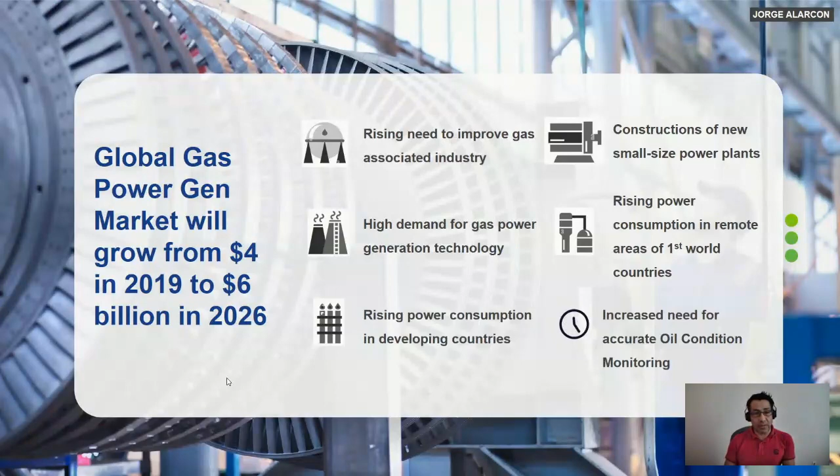So these are the situations that are changing the world as we see it. And what happened around 18 months ago?

I've been working with global customers, and I noticed something unusual from the oil analysis perspective.

I've seen a lot of problems related to four factors, factors that are not only affecting the oil analysis market, of course, but many others.

For example, the raw material for oil bases, the crude oil price, has decreased and been jumping around. So a lot of countries that produce oil decided to cut production for some months.

We have the price increasing. We have a lot of demand, but not enough supply, in some months of these past 18 months.

Besides that, we had a problem with the raw material for additives. The production of raw material for additives is concentrated in just a few countries.

Some South American countries, China, North America, no more than that, plus a couple of ex-Soviet Union countries. So the same thing happened.

These industries were affected not only by COVID, but by all the problems we've been facing through this time, and they reduced production.

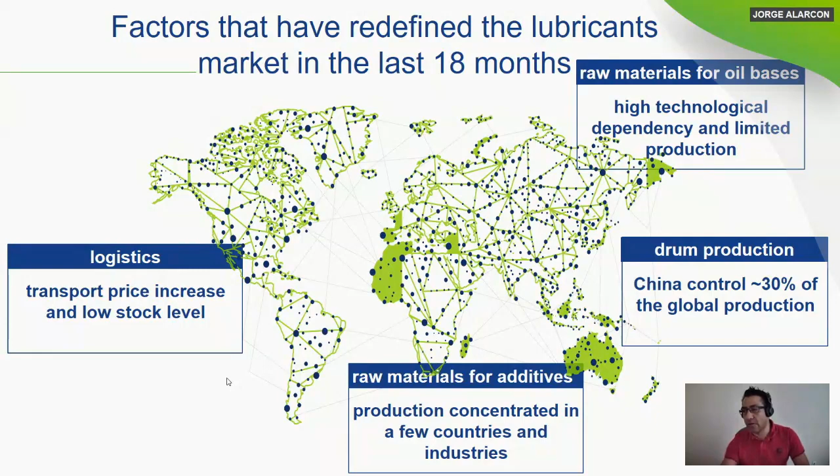Besides all these things, we have another issue that doesn't look very important, but it's critical for our area. Depending on the source, China controls between 20 to 30% of drum production, whether it's the final product or the raw material. We basically depend on China for drums, and we need drums to put the oil in. So a reduction in drum production also affected this entire situation.

So for the end user, this is the global perspective, this is the world we are living in right now. What is happening for the end user? In many cases, unfortunately, the end user needs to add a different type of oil. The problem is that the oil is probably not compatible with the one in service, but they didn't have time to run a miscibility analysis, a compatibility analysis, or any type of analysis that allows them to use this second oil in the turbine with the previous oil in service.

Same thing is happening with greases. I've seen so many problems with greases because of compatibility - and I'm not just talking about thickener compatibility, I'm talking about viscosity, oil viscosity problems, because a lot of people just use the same grease thinking the thickener is the only main thing to compare, and they forget completely about the oil viscosity.

A lot of people are just sweetening the oil, not changing the oil, because they have to wait for about 4 to 6 months to get a couple hundred liters of that specific oil. This is happening in a lot of countries, especially in third world countries and developing countries. The time to wait for some types of oils, even in Europe and the States, has been extended.

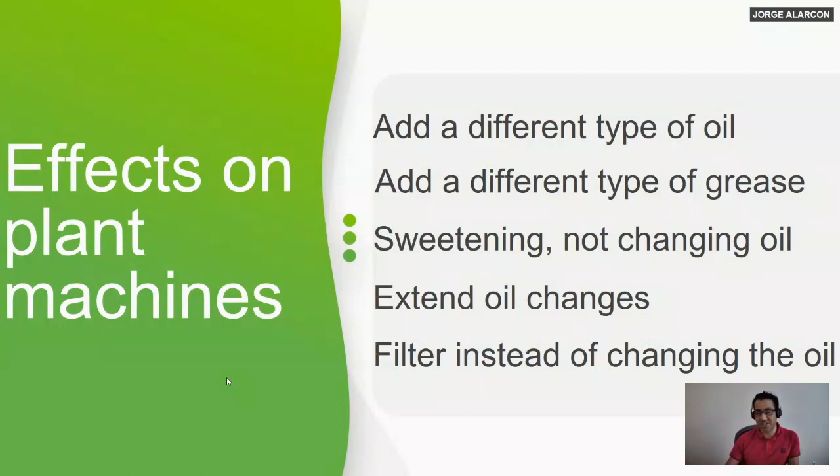At the same time, a lot of people extended filtering the oils instead of changing it. For some reason I've seen this practice, and we can of course expect to have a cleaner oil, but the dead oil, the degraded oil, and the breakdown hydrocarbon chain will remain in that oil - it will not be filtered out. So this is not a solution, just a misunderstanding of the situation.

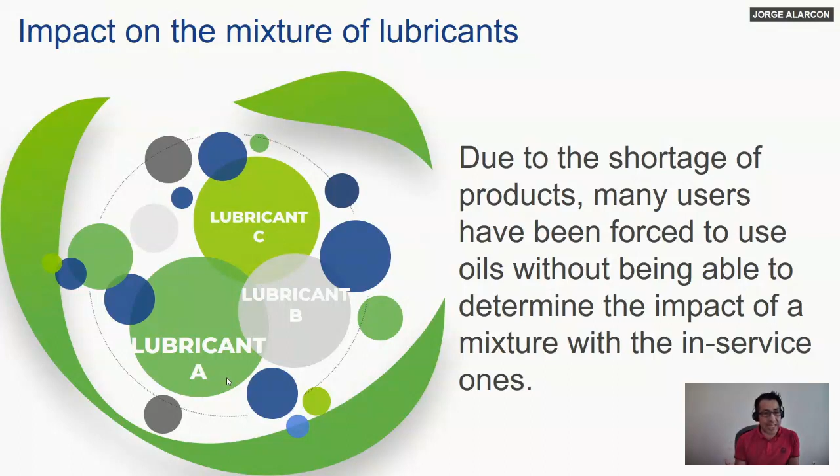Let's talk about the impact on mixing lubricants, because I cannot talk about every single situation I mentioned before. But due to the shortage of products, as I said before, many users have been forced to mix not only one but a couple of, at least two or three, different oils in a turbine. So probably those oils are compatible when they're fresh and new. But the problem is when you mix an oil that is not compatible with the byproducts contained in the reservoir from the previous oil - that is a problem. That is one of the biggest problems we are facing right now.

Let's take a look at this example. This is a case study I've been working on for a couple of months, and as you can see, this is the FTIR spectra. FTIR is a wonderful, wonderful tool that, for some reason, not many labs use in the correct way, and not many end users are aware of this beautiful technique.

So what we have here is in less than 9 months, three different types of lubricants were in the system. We have four samples here. Two of them are the same type of oil, the other oils are different. So what can we expect if we have this type of, let's not say contamination yet, let's say it's just a mixture of oils? It will create a chemical reaction, not only because of the mixture, but because we have temperature, a lot of movement, these fluids flowing in the system.

So it's the perfect scenario to create chemical reactions. Based on an analysis I've been running on about 1,000 samples since this whole COVID situation started, this is what I found. Around 29% of these samples show additive depletion, and I'm talking about depletion that happened before the expected time for additives to be depleted in the oil. A lot of sludge and varnish formation, around 70%, and we're talking about less than a year. So in less than a year, a lot of varnish problems, a lot of sludge problems, and mainly increasing temperature in the oil system. The thing gets worse.

There's a lot of precursors of acid products in the oil, talking about, for example, lactones in this case. So if we go back to that FTIR graph I showed before, the FTIR can identify this type of product in advance, before it turns into acid, which would increase the acid concentration in the oil and generate varnishes. We can see in advance when those products are present in the oil. Again, not a lot of people are aware of how powerful the FTIR is.

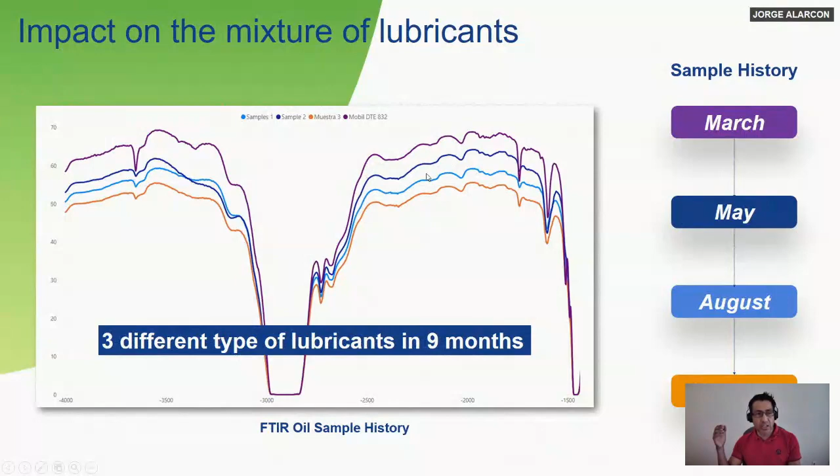So around 50% of the samples I've been studying show this type of problem, acid concentrations. And something that happened with the previous example I showed before: the loss of anti-foam characteristics in the oil. I'm not talking about the silicone additive, that's pretty simple to understand, but the anti-foam characteristics of the base oil. Like in this case, the initial oil completely lost its anti-foam characteristic because of this mixture, because of the presence of two different types of oil that should not have been in the system.

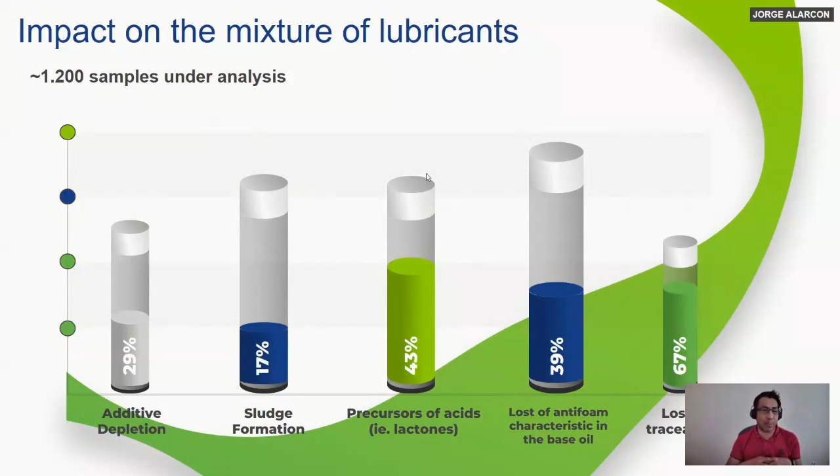And of course, a loss of traceability. We cannot apply the same limits if we have these type of mixtures in the system. So this is very critical.

End users have been asking this question for many years, but this time it's really important—they're trying to understand what's happening with the oil, and they have three priorities among others. The first is they're trying to move from an oil change based on time to changing the oil based on its condition. No more time-based oil changes, but condition-based. What is the remaining life of my oil? That is the key question a lot of people are asking right now because of these situations.

All right, so I have a mixture, I have a chemical problem, I have something I don't know what it is. So when do I have to change the oil? That is the question right now. And the second question tied to this one is: can I extend the life of this oil? Can I use it a couple of years, a couple of months, a couple of days more, even if I'm experiencing this type of problem? That is very important these days, and these are the problems end users are fighting with.

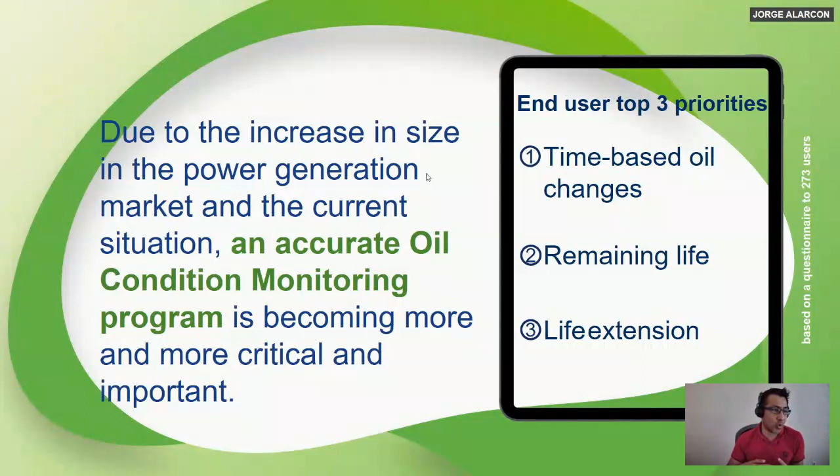So an accurate oil condition monitoring program is becoming more and more critical and important. If we take a look at the oil condition program, at some point we should see it as an investment. We'll invest a lot probably in the initial part of the curve, and then we'll drop some tests that are not necessary, and the cost will drop a little bit. So we need to see the condition monitoring program as an investment—initially it will be higher, and then it will be a little bit lower.

I have this case study in a turbine. So what's happening here? As you can see, we have an oil brand A here in April.

And it's pretty new fresh oil, 4,500 liters in April, with a very short concentration of phosphorus, just about 18 parts per million of phosphorus. So a couple of months after this oil was in service, the end user couldn't find the same oil. So they needed to add 600 liters in July. So for that, they used lubricant B. Lubricant B has a concentration of phosphorus of about 97 ppm.

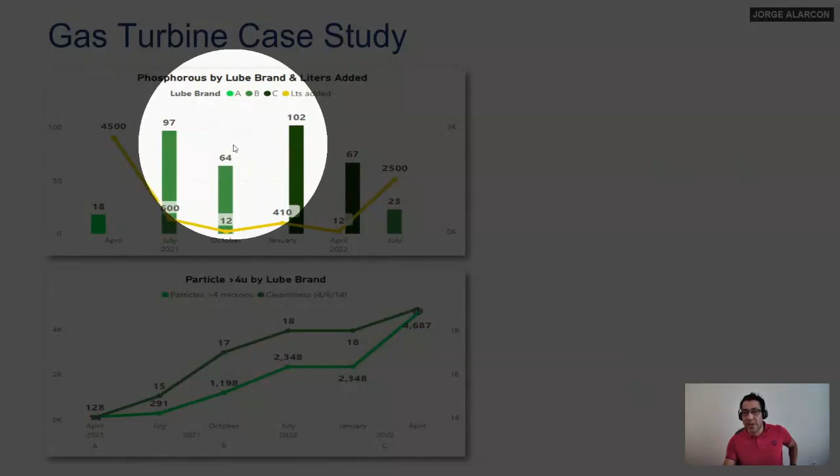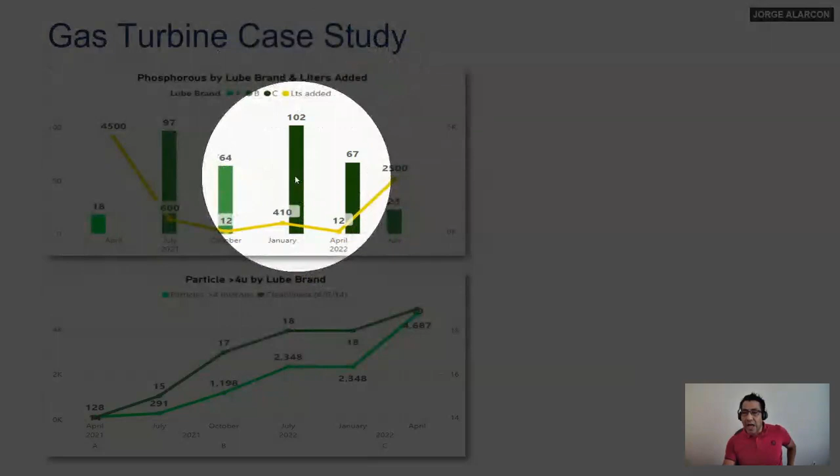So after that, again, they needed to add just a couple of liters, 12 liters in this case, and the concentration of phosphorus decreased to 64. After a couple of months, again, the same situation happened, and the user couldn't find lubricant brand B. The price of lubricant B was extremely expensive, so they looked for a cheaper solution. So they found that lubricant C had pretty much the same characteristics as lubricant B. So they mixed another lubricant again, 102 ppm of phosphorus and only 410 liters, no more than that. So the situation continues and goes on.

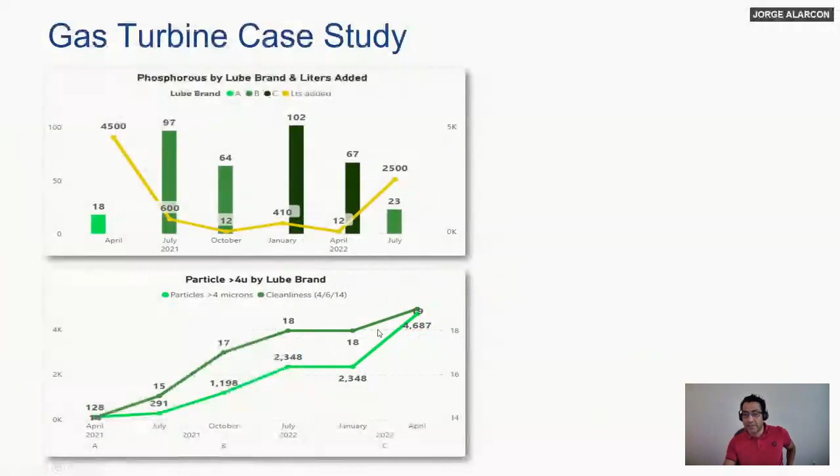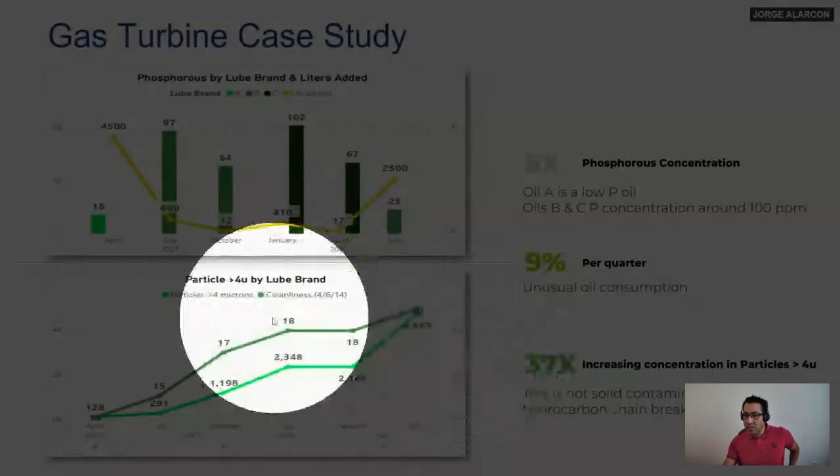So let's take a look at the same analysis, but from the particle count perspective. In dark green, what we have here is the ISO cleanliness code, that is jumping from 14 to 19, 5 ISO codes. If we take a look at the same scenario, not only from the ISO cleanliness code, we will find that the particles larger than 4 microns increased 37 times. That's a lot, right? And this is not solid contamination. A lot of people think that an increase in the particle count is just solid contamination, so filter that oil. That's not the case.

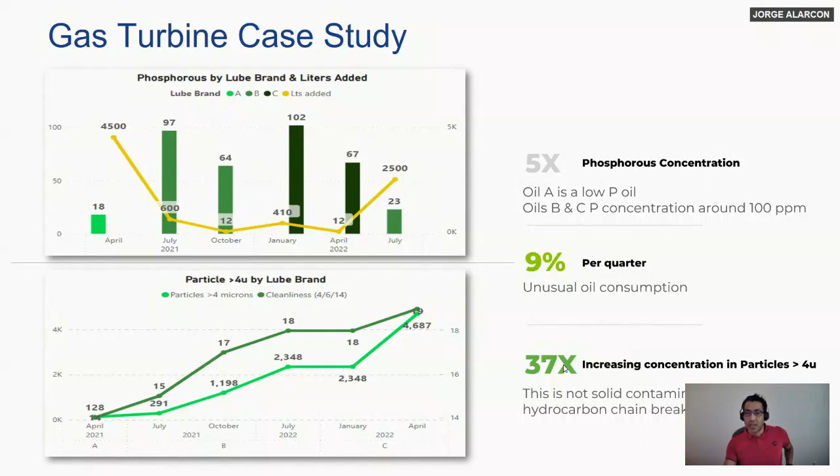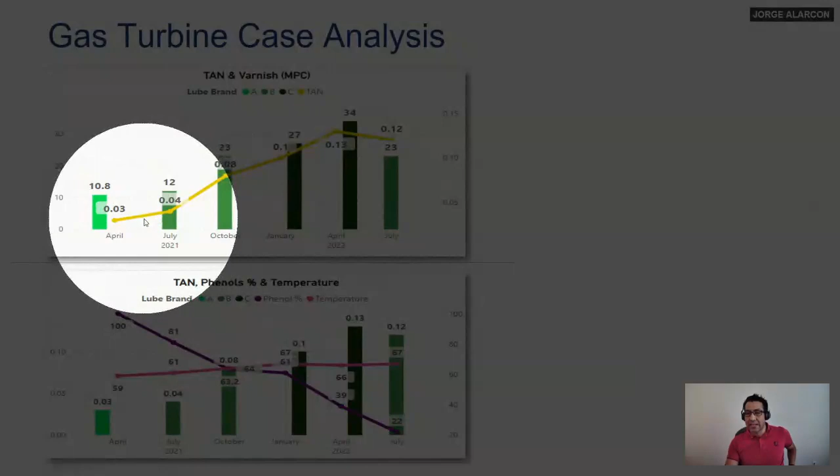In this case, this increase was due to the hydrocarbon chain breakdown. So it means that the large chains of the mixed oil started breaking, and this was due to the chemical reaction that this entire mix has been suffering. So again, let's take a look at the same perspective, but now we'll see the acid number and the varnish concentration. We can see how the acid number started increasing from 0.03 to 0.12, right? So we had a 4 times acid increase in the oil. A proof again that a chemical reaction has been occurring in this oil.

Same thing with the varnish potential, right? We have almost 10 initially, probably because we had some byproducts in the system, and we jump in a year to 34 on the varnish concentration MPC. So again, a proof that something is happening from the chemical perspective. Let's take a look at the same perspective for the phenol analysis. Phenol is in dark pink here, and we can see how the phenol has been decreasing in a year almost to nothing. 80% of the phenol additives have been lost in a year, right? Again, due to the chemical problem that the mixture is causing.

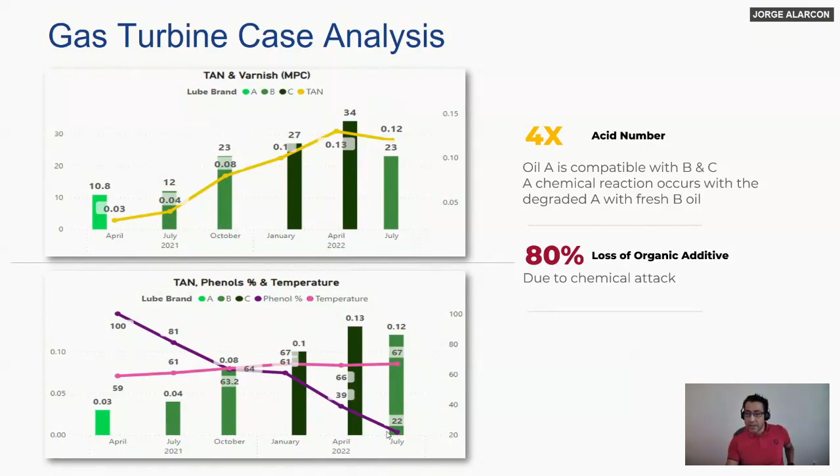So the temperature of the oil in the system has been increasing from 59 to 67. That represents a 14% temperature increase in the system. So it was really close to the critical temperature, and of course, a loss in the heat transfer and dissipation of the entire fluid.

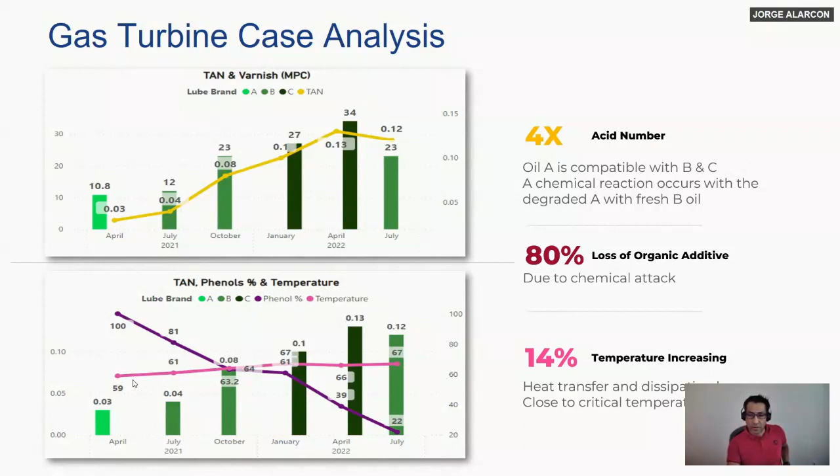I'm not going to tell what happened with this unit, but it's very important to understand the situation that we have been living in the last months, and try to apply that into a more accurate oil condition monitoring program. So my first recommendation is try to run a compatibility test. Not only with the fresh oil, that's easy. A lot of labs already have this type of analysis, a compatibility analysis between oil A and oil B. The problem is we don't have the same type of analysis with oil B and the in-service oil,

and especially with the byproducts of the in-service oil, things that are at the bottom of the deposit, things that are in the coldest part of the system, things that nobody wants to touch. So we're waiting to see what happens with that. So run a compatibility analysis with these two different types of oils that are in the system.

Try to understand what are those degradation byproducts in the system. It's very simple trying to say that those are acids. Yes, but what type of acids? And what are those acids? Or they are precursors of acids like lactones, esters, alcohols. What type of precursors, and what will be the effect on those byproducts if we mix it with a new oil? Of course, a new oil will suffer all the problems from degraded byproducts.